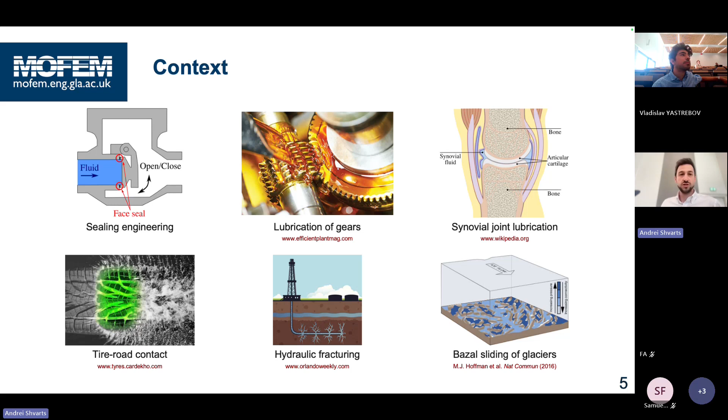But also lubrication, and also thinking about biomedical applications where the fluid can be between articular cartilage parts of the joint, tire-road contact, and some geotechnical applications as well, even as exotic as sliding of glaciers.

The idea was to implement a framework in Z-set, which was being actively developed at that time, where we could project roughness on a very refined finite element mesh, and then bring a deformable solid with this roughness into contact with a rigid surface, and then study fluid flow in the free volume between those two, doing very accurate two-way coupling, such that the contact problem defines the gap for the fluid, but the fluid adds additional pressure.

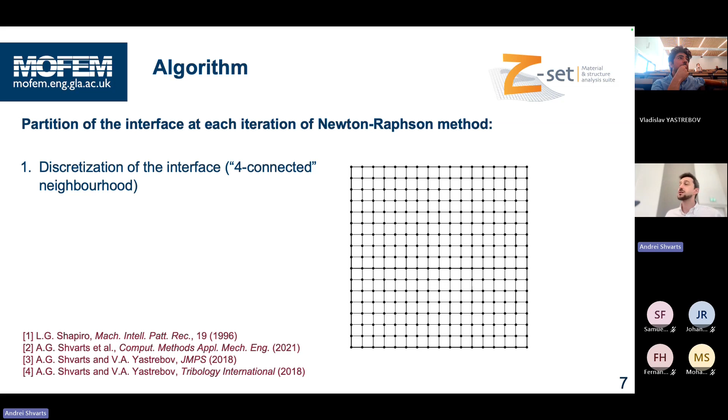Quite a lot of effort was going into developing an algorithm for this, such that at every iteration of Newton-Raphson, we would look into this contact interface, identify contact elements, and then try to look for all the paths the fluid can take from the inlet to outlet. There would be some areas which cannot be occupied by fluid because they are closed off. We call them trapped zones, and we had to identify those.

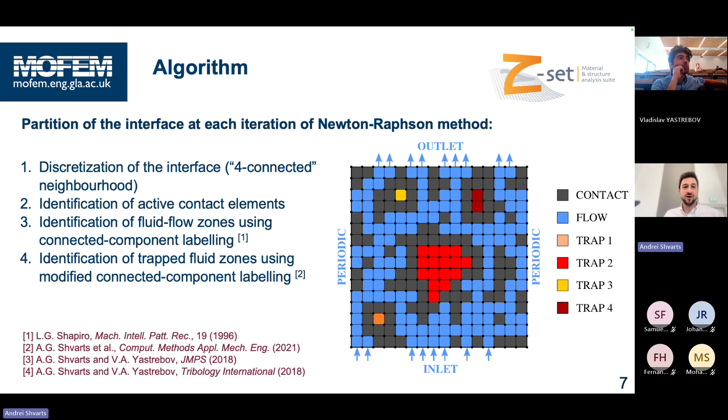Finally, we had to put this all into a kind of monolithic scheme where we have the parts relating to the solid deformation, the contact, the flowing fluid, and also the trapped fluid zones, which were adding additional pressure on the system.

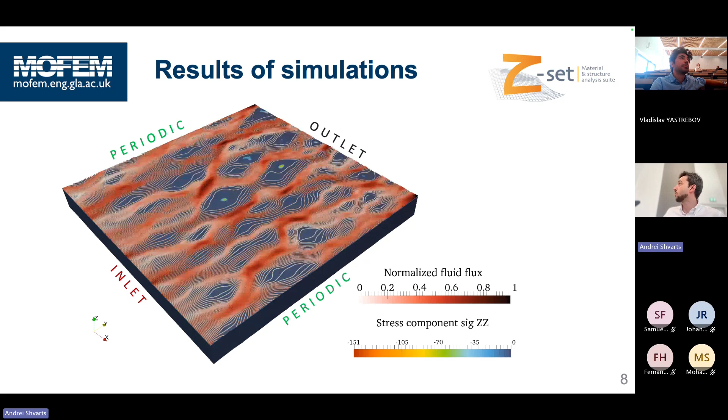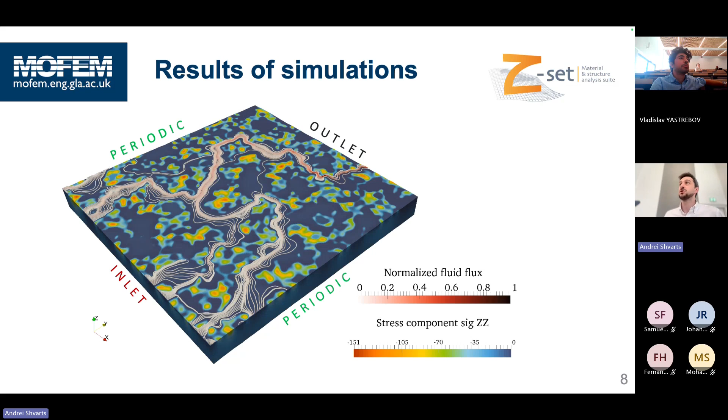And the type of results we could get out of this were looking like this. We could look into the streamlines of the flow with some intensity, and we could also look into the stress concentrations on the tops of asperities which are coming in contact. But we could also see how the pressure is increasing inside of the pools of this trapped fluid. There were numerous pools like this appearing, which were adding to the physics in the interface.

Fast forward to me finishing my PhD in 2019, and then I joined a postdoc at the University of Glasgow, and we were looking into nuclear problems over there.

I don't know if you know that all the nuclear power plants in UK are owned by EDF, and they produce actually quite a lot of energy, not as much as in France, but still a significant amount of energy in UK comes from nuclear.

A decision was made quite a long time ago, in the last century, to make those reactors gas-cooled. This means there is no water inside the reactor. There is CO2, and CO2 takes the heat from the fuel and then heats the water in a different circuit. This was found to be more efficient.

However, this means that the graphite bricks which are housed around the fuel, acting as neutron moderators, take a lot of radiation. And what happens with them is that they crack.

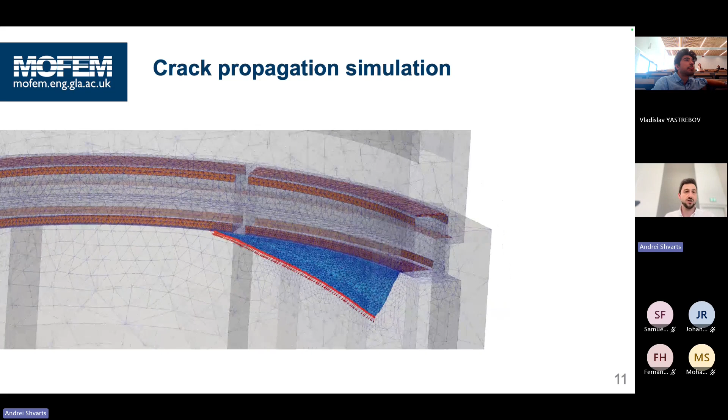So we were looking into the simulation of this kind of scenario, trying to predict how the cracks start, how they propagate, and how the contact contributes to driving the crack propagation.

And what we were quite happy to observe is that we could replicate the shapes of the chips similar to the experiments. Obviously, this was not on irradiated graphite - you can never look into irradiated graphite like this. This was in an experimental setup, but we could replicate the shapes carefully.

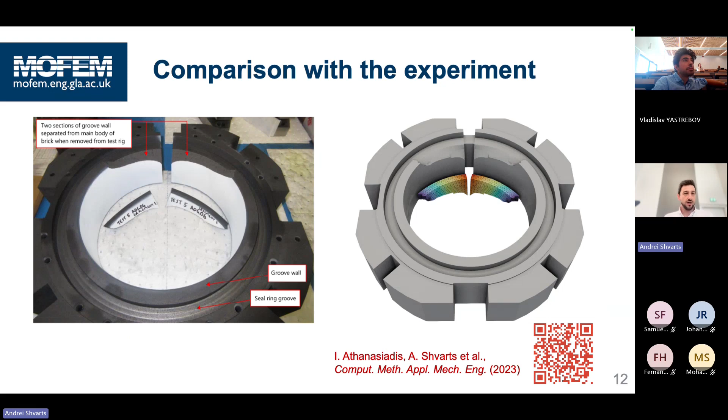Okay, so that's all I wanted to present about my introduction. I want to switch now to talking a bit about MoFEM. All this work I talked about before regarding fracture was done in MoFEM, which stands for Mesh-Oriented Finite Element Method. I hope in a few minutes it will become clear why we are mesh-oriented.

Right now I want to introduce you to the people behind it. We have a group of scientific management, the permanent staff at University of Glasgow, where we supervise the students and postdocs. We have a group of core developers, mostly myself and Lukasz and the postdocs, and then the user module contributors are our PhD students. There are also 15 past contributors, so I would say around 30 people have been developing MoFEM over the last decade.

We have quite a lot of industry support for this, coming from EDF, which I was talking about. This project continues, but then also Rolls-Royce, and recently we started working with German companies, Freudenberg and Siemens, and we have our own spin-out called Mesh-Oriented Solutions that we are starting to develop as well. I'll talk about that in a second if I have time.

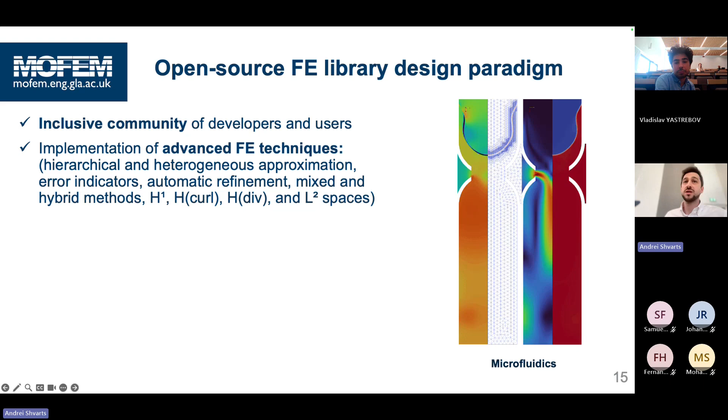These mixed methods are tightly related to the functional space that we're using. Some people call it the de Rham diagram, where we can approximate not only standard continuous H1 functions, but also ones with less regularity that only preserve normal fluxes or tangential components, or completely discontinuous spaces like L2. The whole goal is that by accurate choice of spaces for approximation, you can restructure your algebraic system such that it becomes much more favorable for high-performance computing.

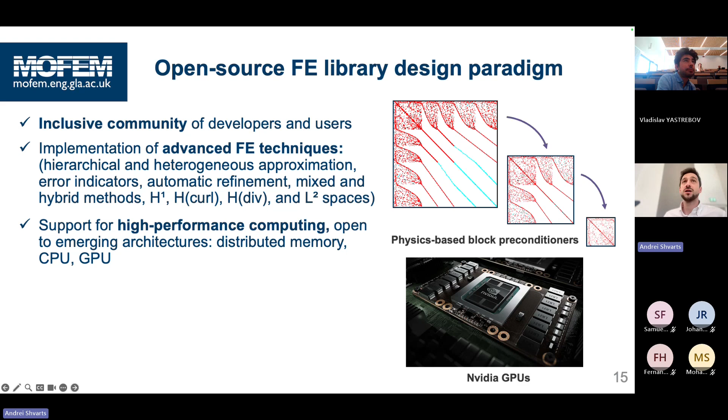I will talk more about this, but the whole idea is to have as many as possible block diagonal matrices, where each element is represented by one disconnected block, because this is the best thing for parallelization. You can quickly spread it on many CPUs or ideally GPUs.

We don't try to reinvent the wheel. We're making our code compatible with many pre and post processors and solvers, material libraries, and so on. And we try to have some elements of professional software development.

I would say this is probably one of the biggest efforts that we're putting energy into, because this is required for sustainability of our development: not just version control, which is standard now, but proper package management, automatic testing, and continuous integration, continuous development, continuous testing pipelines on Bitbucket, so that every change doesn't break the code.

And we have very strict policies on pull requests, that any change coming into the code has to be reviewed by several people, especially nowadays when AI is used. We do put effort into making sure that we understand what the code is doing.

I'm going to very quickly go through the members of the team and the projects I'm working on, just to show you the breadth and depth, but I will not spend too much time on those applications. If you're interested in any of them, I'm really happy to have a chat afterwards.

So two postdocs, Callum and Ananya, are funded by EDF Energy, and they continue to look into fracture, but now they use mixed finite element formulation for fracture. The idea is that you do not need to do anything with the mesh.

You don't need to cut it, you don't need to remesh. The specific choice of approximation spaces lets us propagate the crack using the discontinuity of the displacement field itself. And the whole goal is robustness, accuracy, and efficiency. I will reiterate on this many times, and I will show examples of how this is used.

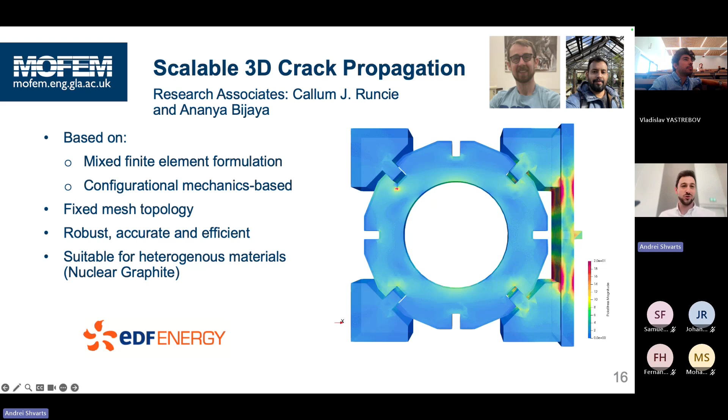Ross is another postdoc. He is working with Rolls-Royce, and he is looking into plasticity, specifically the problem of linear friction welding. It's a very violent problem where you see certain material coming out of the interface. So he's working on developing that.

It has to look at elastoplasticity and large deformations, but also thermal softening and thermal effects. And now he is extending this to look into contact of those pieces coming out of the interface.

Leo is one of my PhD students. It's my collaboration with the Deep Nano group of Professor Viktor Georgiev, and we are extending MoFEM capabilities to semiconductor simulations, trying to look into different devices, different scales, and Leo in particular is looking into drift diffusion and deep density, so density gradient quantum corrections, but also I'm helping him with what I learned during my PhD into adding roughness into the interfaces between different parts.

Here is roughness between an oxide and silicon. He's looking into the effects of this roughness on the performance of the device.

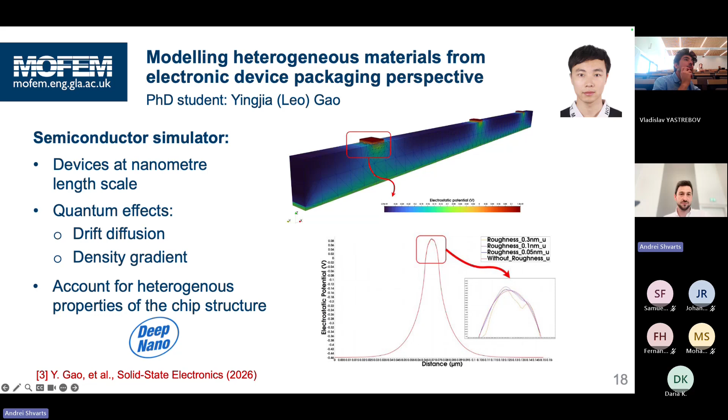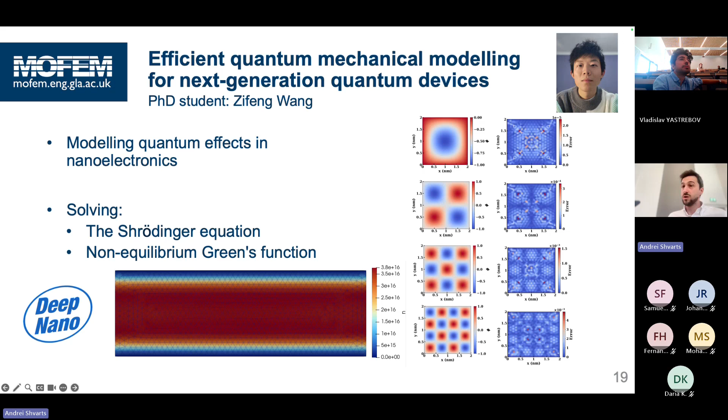Another PhD student coming from Viktor's group is Zifeng, and he is looking into simulating more or less the same devices, but from a purely quantum mechanics perspective with the Schrödinger equation. But since our code is quite universal and not specifically tied to mechanics problems, but can solve any PDE, it's not a problem for us, with the help of PhD students like Zifeng, to extend this to the Schrödinger equation or non-equilibrium Green's function. But this is just the start of this work.

Two PhD students joined us last year, funded by Freudenberg. Mohammed is the first of them, and he is looking into optimizing tubular structures for braiding for catheters, for medical applications. He's using an adjoint method for this. That's the plan of the work, to use adjoint optimization to make sure those tubes work well both in tension and torsion, and can sustain certain kinks happening in those applications, and so on.

The second Freudenberg PhD student is Cleison, and he's looking at an interesting problem of mechanical seals. Those are devices where you have to introduce sealing between rotating parts, but you cannot put any material there because it's just going to be destroyed by friction. So the idea is to keep the interface sealed by the buildup of pressure in a tiny gap.

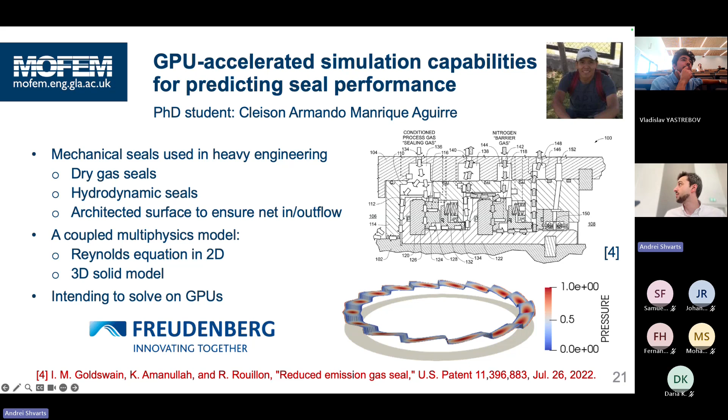So that's what he's working on for the moment on the Reynolds equation. The idea is to couple 3D solids with 2D Reynolds equation, also using the mixed methods.

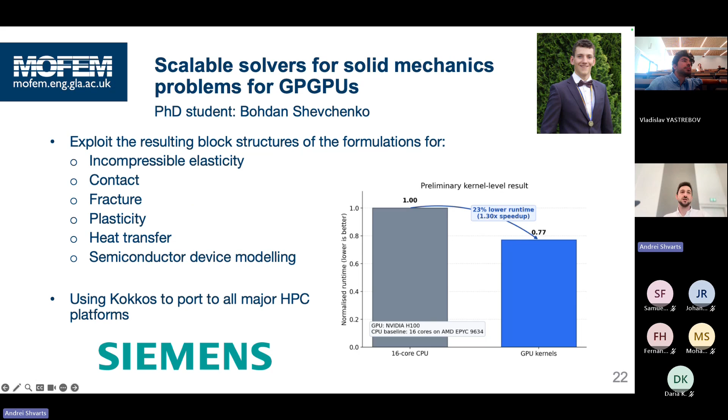We have a dedicated student, Bohdan, funded by Siemens, specifically focusing on porting our code to GPUs. Other students are responsible for creating the matrix structures efficient for GPU parallelization, and Bohdan works on actually coding what happens on the GPU side. Right now he has chosen a library called Kokkos for this, after several different tries of other available tools.

Kai is another PhD student I supervise. He is not developing MoFEM directly - he's actually working in the School of Cancer Studies, looking into mechanical changes in flies when they are infected. He models the infection using some kind of bacteria. The idea is to see how the body of a fly restructures and reacts to the infection, and use this as a model of the response to cancer. A very standard method in this domain is to use atomic force microscopes to probe the stiffness of tissues, and what I'm helping him with is accurate identification of material properties using finite element simulations.

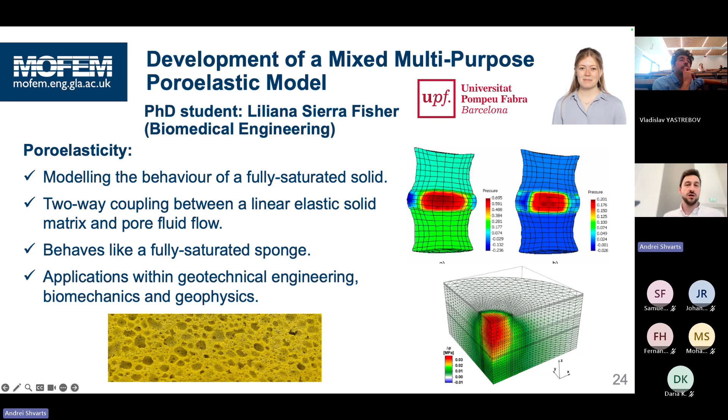Lily is another student we have who is looking into problems of poroelasticity together with colleagues at University Pompeu Fabra in Barcelona. She's developing a mixed poroelastic solver which can be applicable both for biomedical and geophysics applications.

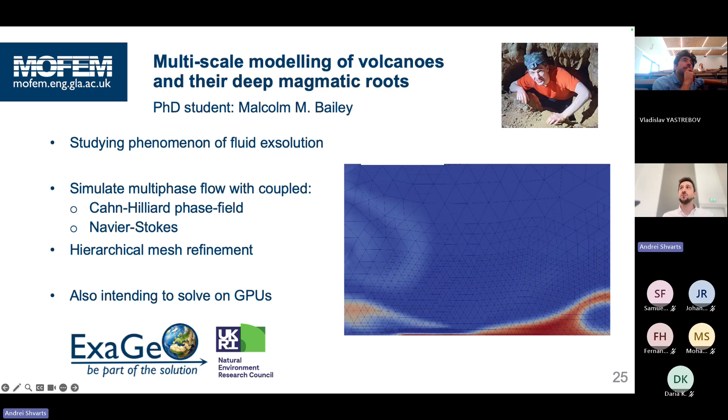Malcolm, I don't directly supervise him, but he's working in our group, and he is looking into magma simulations, also using MoFEM. Finally, in this deck of slides, I wanted to mention our spin-out, initially created by Karol and myself - Lucas and Chris have joined him.

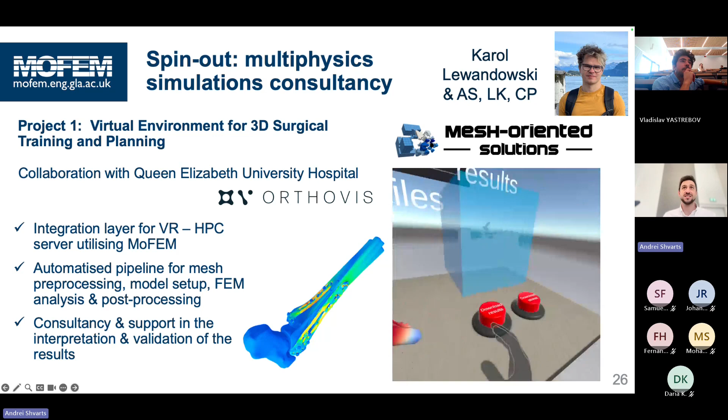It's called Mesh-oriented Solutions, and our first project has been, and still is, a collaboration with a hospital in Glasgow - I think the biggest hospital in Europe, which also does research. The idea is to use VR to help surgeons plan surgery on a patient with broken bones, where they can try to assemble those bones together in VR before doing the actual operation.

Okay, now I want to switch to two more research problems where I could showcase how the ideas I discussed before can be applied in practice, just to make it a bit more tangible.

The first one is about the data-driven finite element framework. This was the work of my first PhD student, Adriana, who finished very successfully last year. Now the second student working on this is Heri. They're both funded by EDF Energy.

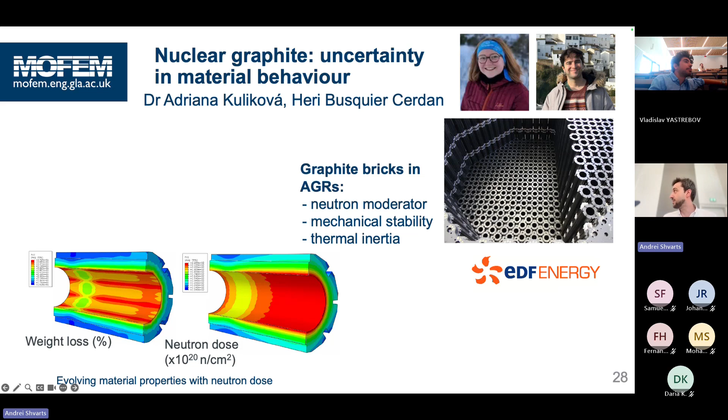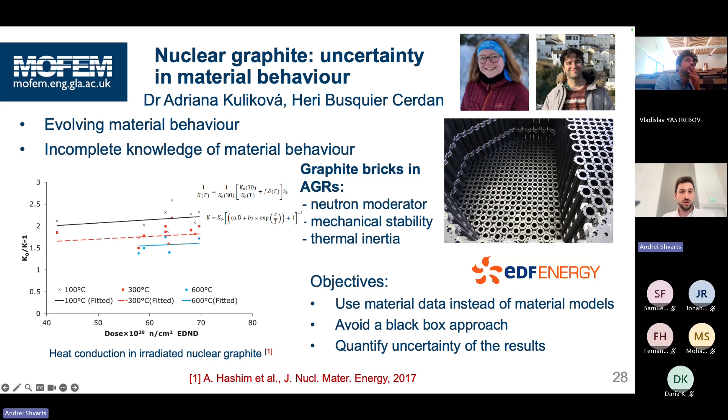So our idea was to try to create a method which would use material data instead of material models, but would avoid a black box approach that maybe some of the modern machine learning neural network approaches do. We want to be able to minimize the errors, but also quantify the uncertainty of the results.

Maybe what I want to ask is how many of you are familiar with the data-driven finite element approach of Michael Ortiz? Okay, good. So I will do a very quick introduction of that, but hopefully it will make sense for you.

The idea is that we were looking into the thermal flow problems. If you look just at the conservation laws for the thermal problem, that's something you know should be satisfied exactly - this is a law of nature. The boundary conditions are also something you want to observe exactly. So we're looking into the temperature gradients and fluxes.

Well, obviously we cannot solve this problem - something is missing, the constitutive law is missing. But constitutive behavior is something we want to avoid, because it's always approximated. When you start to look into complex materials like irradiated graphite, those material models can be a little unreliable. But the whole idea here is: let's say you have a huge set of data points showing the dependence of heat flux on the temperature gradient.

Okay, maybe it would be more accurate if we said that this was one of the components of the heat flux versus one of the components of the temperature gradient.

Okay, let's say that you have this kind of data. One could say that probably it's noise, there's lots of noise. Let's fit this to Fourier's law, let's find this coefficient k, and that's it. And let's use that, and let's forget the data.

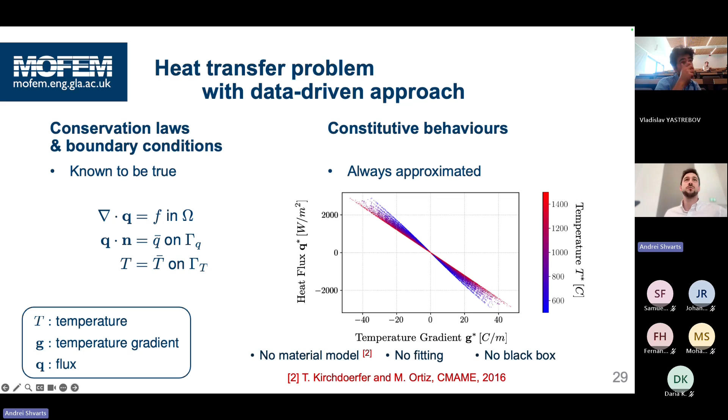Okay, so we sometimes say that finite element method is an art of controlling errors. So this is what we wanted to bring to this data-driven world, if you want, and that we can use the finite element formulations, weaker mixed formulations, for example, to control the errors, to refine only where we need to refine, and so on. And that would allow us to remove the finite element approximation errors from the uncertainty associated with the material behavior, with the data.

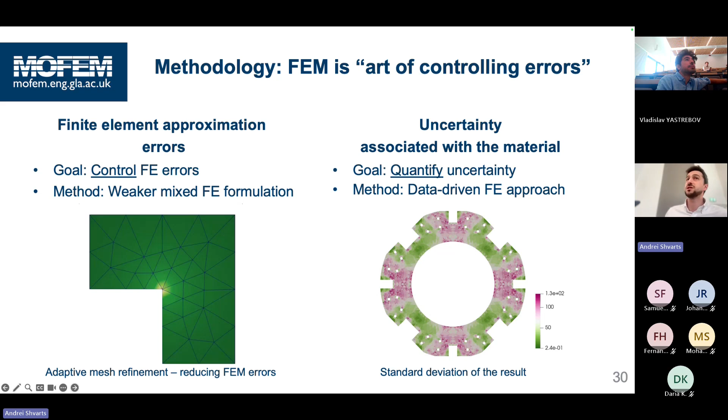And then once we have done that, we can properly quantify the uncertainty of the data. And this is where the data-driven approach shines the most.

Okay, so in a nutshell, what is the data-driven approach? You think about two domains. The spatial domain, where you have your finite elements, you have integration points, and in those integration points, you have the fields like temperature, flux, and so on.

Okay, and then, but this point from over here might not be satisfying our conservation laws. So what we will do, we will try to map these values from the data set back to our integration point, and we will try to minimize the functional, bringing the values at this integration point as close as possible to this data set values.

But at the same time, we will add conservation laws and boundary conditions as constraints, which are to be satisfied exactly, or in the integral sense. So that we will keep satisfying those constraints, and we will try to be as close as possible to the data set. And we will try to do this iteratively, and we will get closer and closer to the data set. And at the end of the day, we're going to have an intersection of a kind of a hyperplane, which satisfies conservation laws and boundary conditions, with the data set.

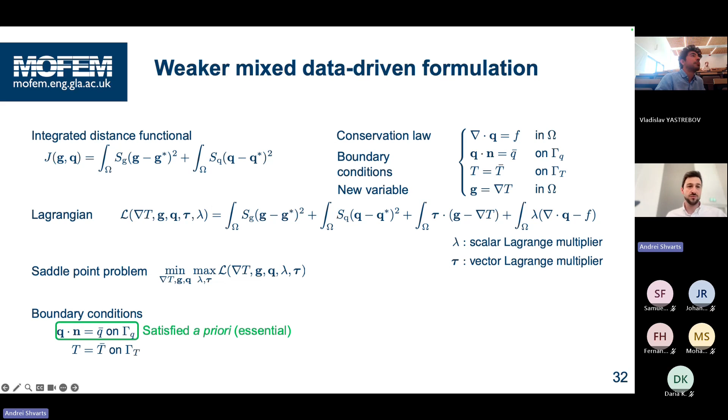So this is where our new formulation comes in. We introduce a new variable, which would represent for us the gradient of temperature. And then we will solve the saddle point problem, and we will treat properly boundary conditions. Okay, I don't want to spend too much time on these technicalities.

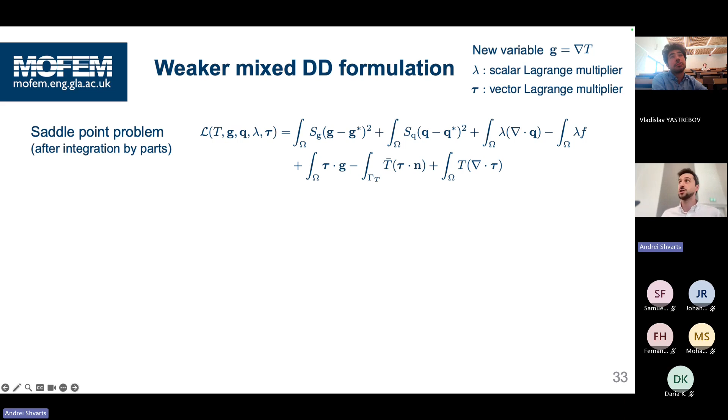It means we can choose finite element spaces differently from the original formulation. Specifically, we can choose discontinuous approximation for temperature, gradient of temperature, and lambda, because they do not have any differential operators acting on them. This is actually quite favorable for data-driven methods, because you can have different material properties chosen at different integration points of your elements. So there could be jumps in response even inside of the element, let alone between the elements.

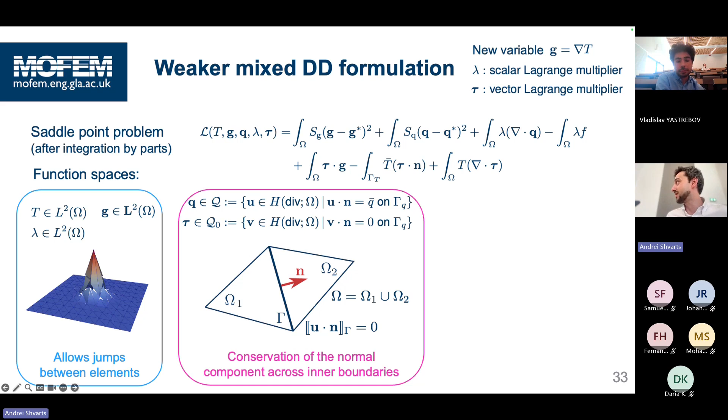But then for the flux, we need to choose a space which allows us to compute divergence. That's the space called HDIV. The intrinsic property of this space is that it conserves normal flux across any inner boundaries. So for free, we get a space designed to satisfy conservation laws in the strong sense. But what's also more important, this is the bridge towards efficiency, is that we get a matrix structure which has a lot of those block elements.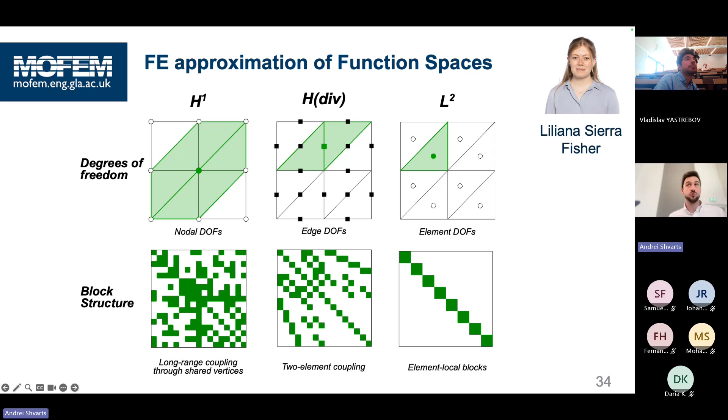Okay, you cannot have the whole matrix looking like this. You need to have some mustaches coupling them together, but that could be easily dealt with Schur complement. I will show a small example of that later on.

But this efficiency is only one of the aspects. A different aspect is that we have high accuracy, high convergence. If we compare the original stronger formulation with more classic fields to our formulation, the weaker one with the fields I've just discussed, we see a very different story. In the standard formulation, your temperature will be continuous, your flux will be discontinuous. In our formulation, it's the opposite: the temperature is discontinuous, the flux is continuous, or at least the normal component of the flux is continuous.

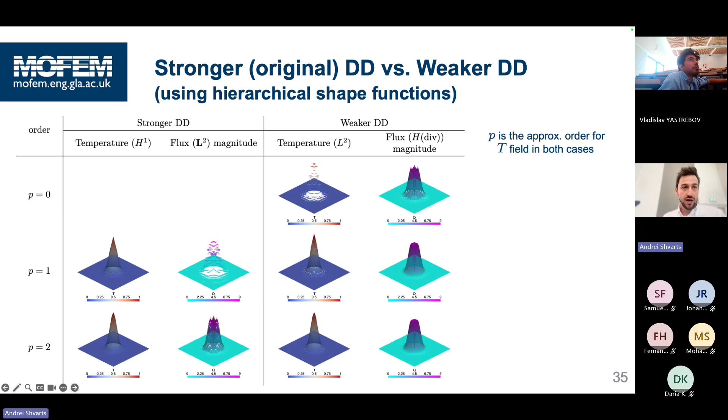What this means is that we can look into the a priori error estimates. For example, they're available for our formulation for both temperature and flux. If we look at the error estimates for the standard formulation, the estimate for the temperature field is the same in both. But for the flux, we have convergence with rate p plus 2, while for the original one it's just p. So we have super convergence with our method because of the proper mixed formulation. What's also nice to observe is that the approximation of flux for the second order is the same in the standard one as the approximation of flux in the 0th order, which means it can be pretty efficient.

Another benefit which comes from the mixed formulation is the error indicators. I talked about a priori estimates, you get that from the very beginning, you know what's going to happen, it always works if your implementation is correct. But what's sometimes more useful is a posteriori error estimates, which can drive adaptivity. I'm not going to go into the details too much, I just want to show you an example of how we do this.

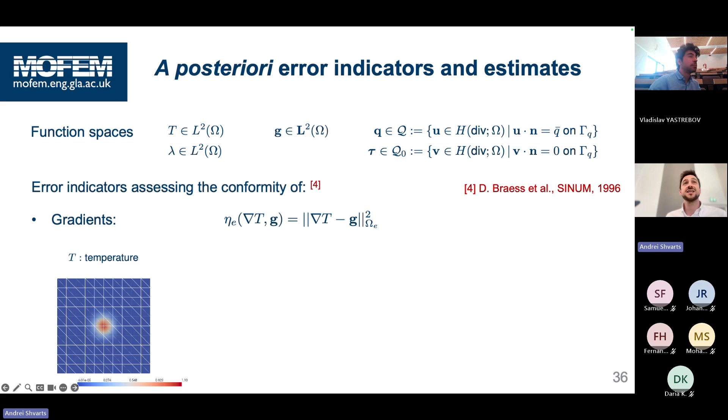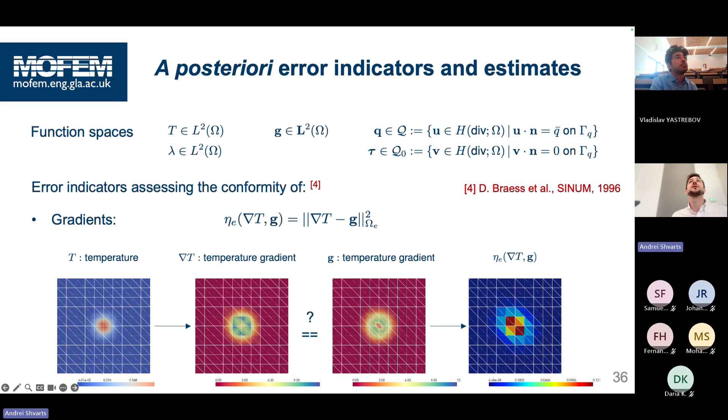So we get this temperature field, and it's discontinuous between elements. But once you've obtained the solution, you can compute gradients numerically on this field at every point inside each element, compute them at Gauss points, and visualize them. We also have this field G, which stands for the gradient of temperature, approximated separately. They are somehow close, but not exactly. This is where the error estimator comes in, because any difference between this field and this field is our finite element error. So we can look at the difference between them and highlight the elements where this error is highest and refine them, either by refining the mesh or increasing the approximation order.

There are more accurate error estimators that we have looked at, but I don't want to spend time on this. I want to jump to an example.

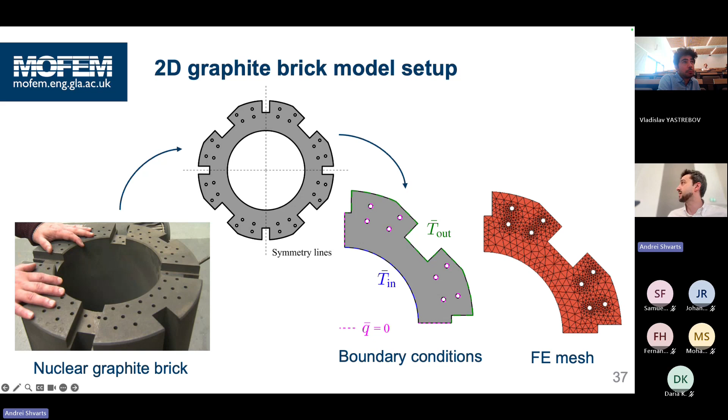So we looked into this graphite model, and we were looking at the problem with high temperature on the inside and lower temperature on the outside. This represents what's happening with those bricks in reality. We didn't have the actual data, so we generated synthetic data ourselves. We looked into a standard finite element analysis with a complex nonlinear material model relevant for graphite. We generated and obtained the solutions, took the Gauss point values from the fields to generate a data set, and this is how it looks.

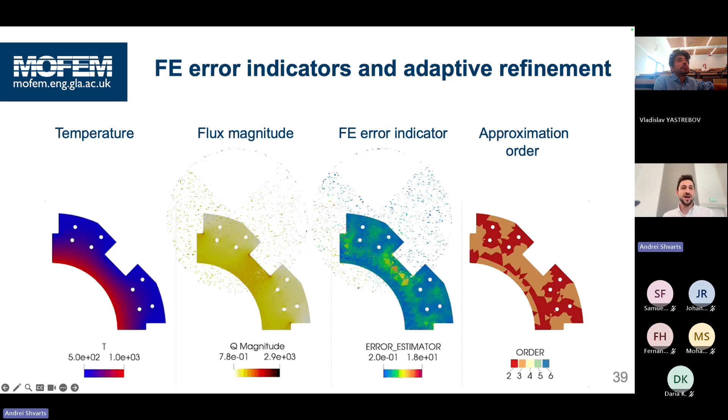So Joanna spent quite a lot of time understanding why, and the answer came from the fact that she looked into the values of the fields in those regions where we have those high errors. She mapped them to our phase space of the material dataset, and she realized that those points are actually quite far from the dataset, so we don't have enough data. We need to do more experiments with this particular material to be able to map better the values at those elements.

But what it also meant for us is that those finite element error indicators are not good enough for quantifying the problems with the dataset. So Joanna introduced a so-called data-driven error indicator.

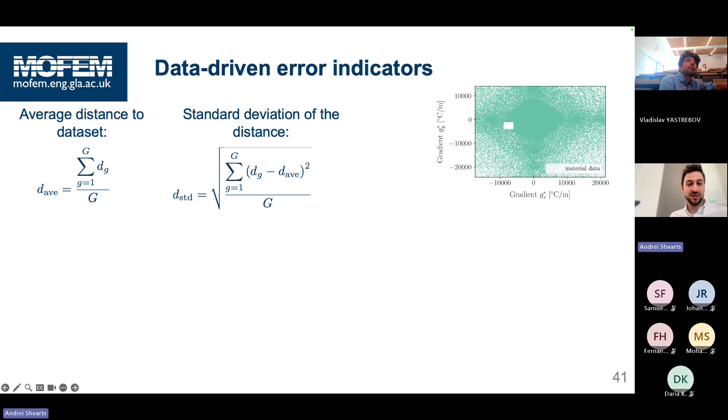An example here: we took a dataset and we specifically took out a small portion of it. Let's say our equipment was faulty in that region - there was something wrong with our thermal camera, and that's why that place is blank. There's missing data there. So we did a similar kind of analysis with adaptive refinement, but also looked into this error indicator, which is based on the distance to the dataset.

We compute the average distance from the field values at integration points to the dataset, and the standard deviation of that. And what we have observed is that there are regions where we have this higher average distance to the dataset and high standard deviation of that.

And what's most important here is that if we map those points, those values, back to our dataset, they're exactly in that empty window. So we can identify, without actually knowing a priori, where the problems are in the dataset. So we can tell experimental collaborators, let's do more experiments if you want to have reliable results.

But missing data is not the only problem. You quite often have noise. So we wanted to have a tool which would measure the noise. And for this, we proposed a method of uncertainty quantification based on the Markov chain Monte Carlo.

The idea there was, to test this, we just got this dataset and added some artificial noise. And the idea was to do our refinement. Since we have done the refinement, we are very efficient in getting accurate results, so we can try to perturb the resulting fields and solve again, and then perturb again and solve again. This is in a nutshell what a Markov chain Monte Carlo looks like in this particular case.

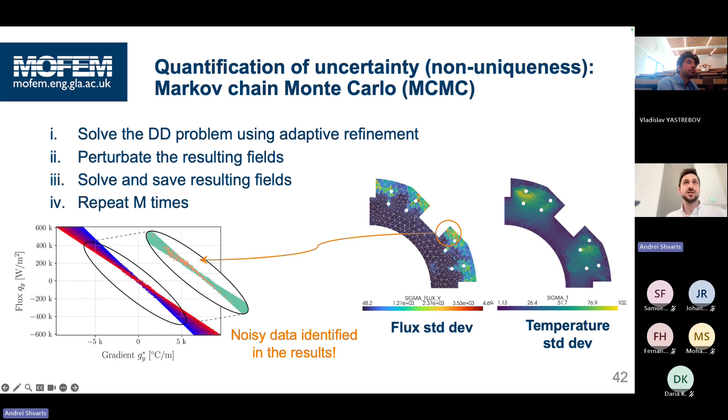Okay, I don't want to spend too much time on this. I wanted to cover contact as well, so I will skip those slides. And if anyone is interested in data-driven methods and its extensions, I'm happy to talk about this.

In the last 10 minutes, I will just look into our work on contact. And maybe I will try to explain the main kind of beacons of development for us, which are to ensure robustness, accuracy, and scalability of our tools.

And this is not just about the contact - this is for all of the applications we are working on. But I will try to explain an example of contact, what those mean. And we will look into many different contact problems.

For example, those ones related to graphite bricks - they have contact originating, we have fracture originating from a contact corner. And I think it's like this - please remember that, we will see this example later on.

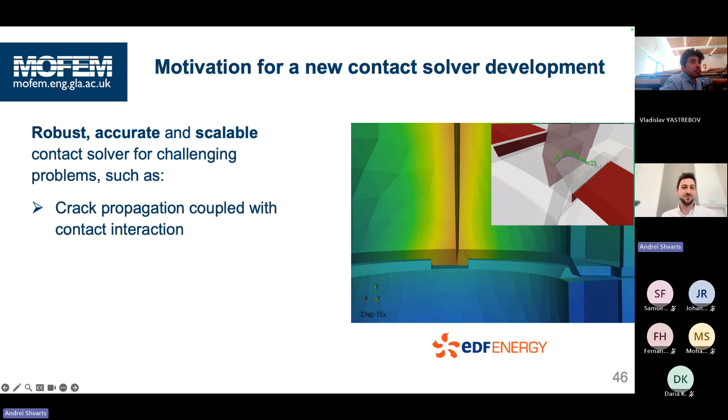I will use that. But we have other problems with plasticity as well, used for forming, linear friction welding that we already talked about, and then turbine generators, one of the examples that one of my students is working on - I'll show some results at the end. And then also what we've been doing from our spin-out with Freudenberg, looking into the bushing and sealing applications.

Okay, so the contact problem. How many of you know the contact problems? How many of you know the contact problem formulations?

Good, so I'm not going to spend too much time on this, but the idea is that you introduce the gap function, you introduce the KKT conditions, which govern the fact that the gap shouldn't be negative, you shouldn't have penetration, your pressure shouldn't be positive, meaning that the normal traction shouldn't be positive, meaning that you don't have adhesion. And then when one is 0, another one is not.

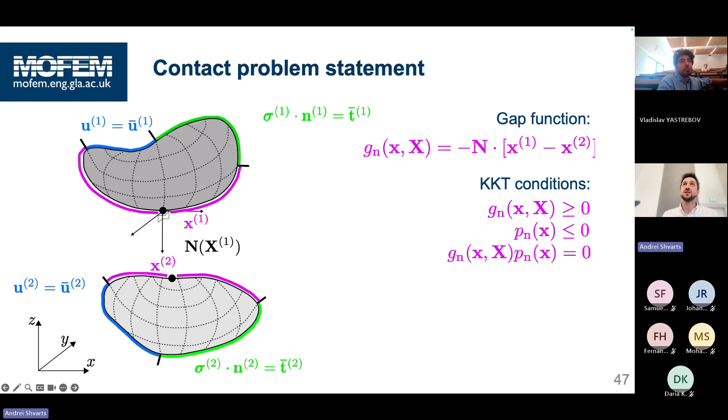So usually you solve these problems using Lagrange multipliers. And one of the methods which is very efficient for this is to use the complementarity function. And then when you formulate the weak form, you have the standard internal and external terms. The internal is coming from the stress inside, external is coming from the tractions outside. And we add the terms for contact.

So we add an additional term representing virtual traction, virtual work of contact traction, where instead of the value of the traction, we have Lagrange multiplier. And then we have the additional equation, which we use to enforce the KKT condition. This is just our complementarity function weighted by the test function of Lagrange multipliers.

And in this setting, it's very clear which space we can use for displacements. We can start with the standard H1. But the question is which space we could use for Lagrange multipliers.

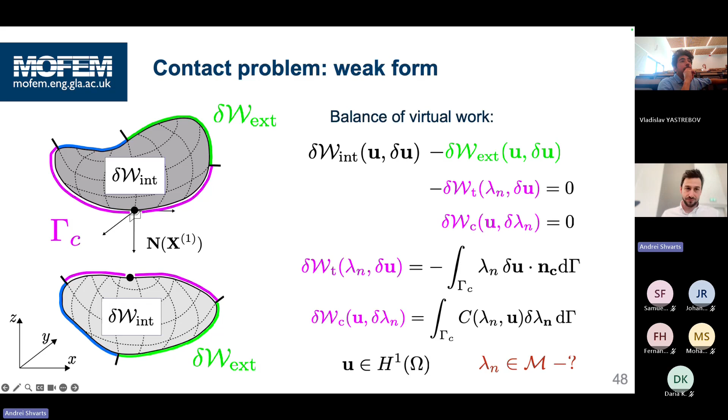Maybe to show very quickly why this is so important, if you start from the simplest problem that several of you have been looking at, a wavy surface of a solid body, which is coming in contact with the rigid flat.

If you take continuous shape functions for the approximation of Lagrange multipliers, you will see something like this. You will see a result which agrees with the analytical one almost everywhere. There are some discrepancies here at the center because I used first order approximation. I know that I can bring it closer if I use either a finer mesh or higher order approximation.

But look into the problems over here. Look into these horrible oscillations. They're not really leading to any catastrophic instabilities, but they are not nice. You don't get the correct approximation at the boundary between contact and non-contact zones.

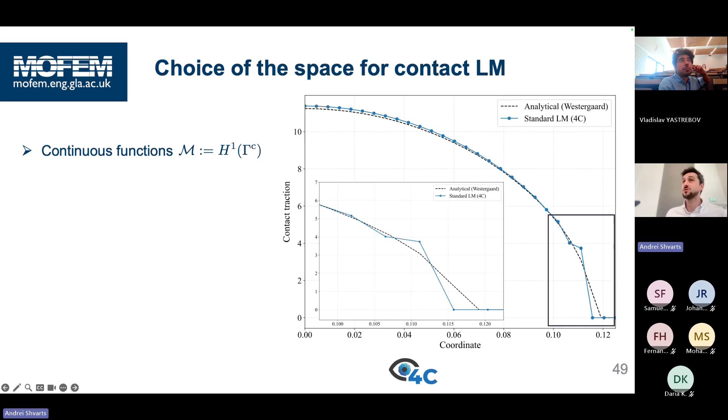And the reason for this is the variational crime we made by considering continuous functions for Lagrange multipliers, which are not continuous in reality. People have found a solution for this, particularly the work of Barbara Wohlmuth and her colleagues, to introduce the dual space. So the idea is to go into a discontinuous space, or dual space, for Lagrange multipliers. The idea is that if our approximation of displacement is in H1, on the boundary it has a trace in space H1/2.

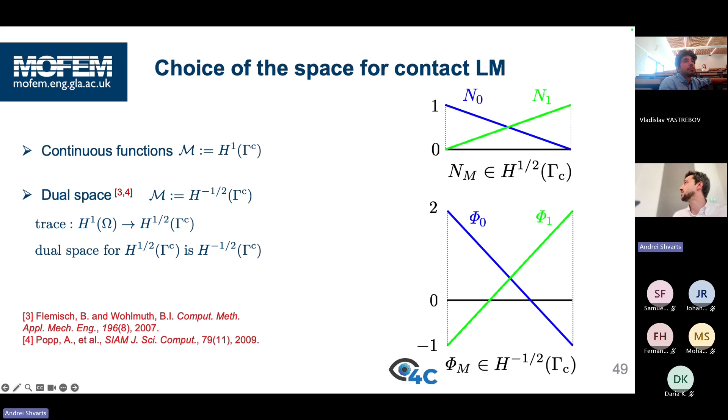It's called fractional Sobolev space, and the dual space to that is called H-1/2. And there are some special dual shape functions which can be constructed, which are from this space. And that works very well. You get the solution which looks the same everywhere, except for this boundary of contact, non-contact, where it doesn't have oscillations.

But we wanted to extend this because this basis is not hierarchical. It's very hard to construct high orders. And also, it might have some other issues in some specific cases.

And remember, I was telling you about the contact in a corner of 90 degrees. So I tried to replicate this problem. Imagine a bimaterial plate where you have a contact on a horizontal interface and on a vertical interface. And we squeeze it from both axes with some value of pressure vertically and another value of pressure horizontally.

And what you expect is that in this particular symmetric case, you know what should be the values of the contact pressure on this interface and what should be there. So if you try to approximate this problem using continuous standard shape functions, we used the 4C code for this.

You will see oscillation. So in this first part of the interface, I'm showing the horizontal part, from -2 to 0, and then from 0 to 2, I'm showing the vertical part. So you know what it should be. It should be 0.1 until the coordinate 0, and then it should be 0.01 later on. But it's not that, because our shape functions can't approximate this discontinuity.

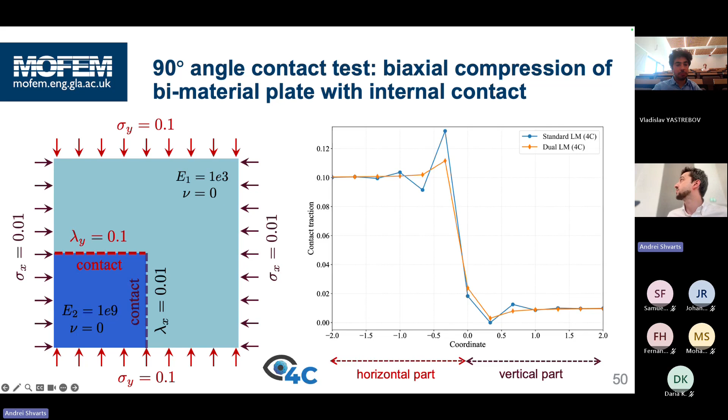They are based at the nodes, as you can see in this construction. Yeah, they are still based at the nodes, so they cannot approximate this jump exactly. So we want to have something more general. I probably don't have too much time to go into details.

I'll just try to explain the main idea: we have Lagrange multipliers that are not scalar, not vectorial, but tensorial. Because we can create this space which looks like stress, but not exactly stress. It's not symmetric. We can construct this tensorial space of Lagrange multipliers, which are in HDIV approximation. And if we take their normal trace on the contact boundary, it will be exactly in this H-1/2 space. So it will be very similar to these dual shape functions, but constructed differently.

And all we need is to go into our weak form and substitute this traction coming from contact by this normal trace of this tensorial field of Lagrange multipliers. The trick is to approximate those Lagrange multipliers in the elements adjacent to the contact zone only. So all we need is to compute this traction through this boundary, and for that it's sufficient to have degrees of freedom only on the contact edges.

And we can still compute the shape functions of those degrees of freedom in those adjacent elements. But the degrees of freedom will live only at the edges, not at the nodes, not at those internal edges, only on the edges exposed to contact. And by using this formulation, we can still formulate our terms for contact, for virtual work of contact. They look a little bit longer, but they have exactly the same meaning.

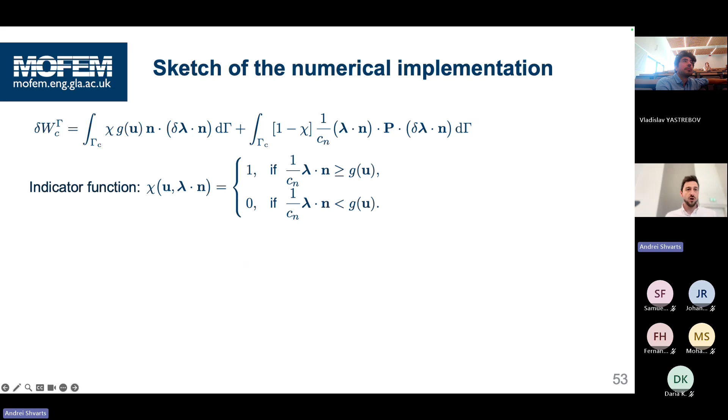I don't want to spend too much time on the numerical implementation just now, so I will skip that. I just want to show you the results, which look very nice, where since we don't have those Lagrange multipliers at the nodes, we have them only at the edges.

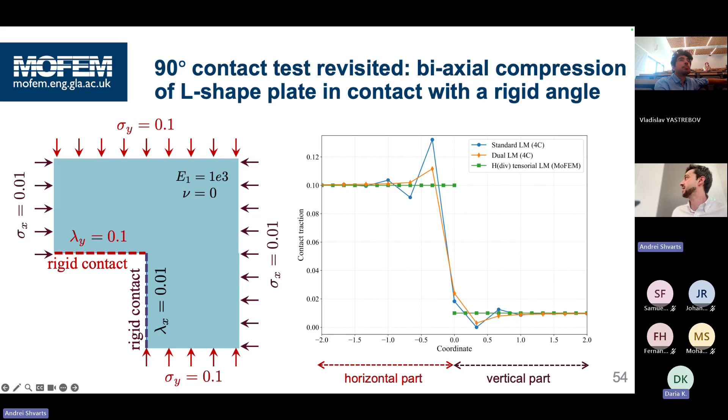It means we can represent the jump of our contact traction between this part of the interface, where it should have this value, and this part of the interface, where it should have 10 times smaller value. We can represent this with our formulation exactly.

That was robustness. Now for accuracy, it's about convergence. So we could look into some classic problems where we have an analytical solution for the contact pressure. We can look at the a priori estimates for the expected error of the normal traction, and using our hierarchical approximation, we could test the convergence by decreasing the element size for different orders.

And we recover the expected estimate for the first order, but then as we increase approximation order, we get a higher and higher slope, which consistently increases by 1. This was for the case of full contact.

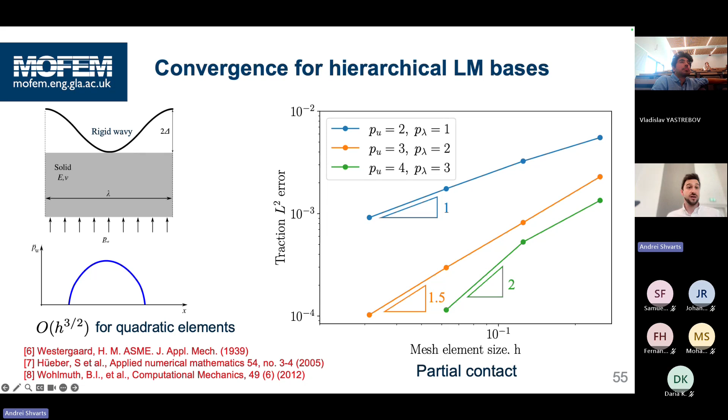It's quite more complex for the case of partial contact. There are different estimates for this case as well, and we could recover them and keep improving if we increase approximation order. So we are sure that we have accuracy with this formulation.

And the final part is the scalability or efficiency. This comes from the fact that we could construct a very efficient solver. You know that when you have a saddle point problem like this, you cannot apply iterative solvers, and you cannot apply a direct solver for this if the problem is too big.

You can use MUMPS for the problem with tens of millions of degrees of freedom, but the memory required would just go through the roof. You cannot apply an iterative solver to this matrix because it's not positive definite. It's not going to work very well.

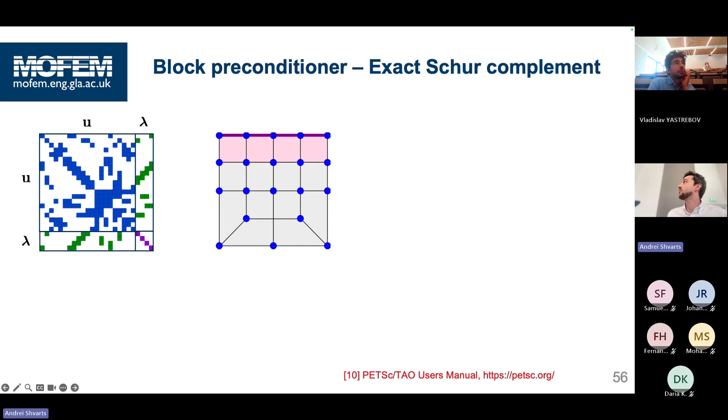You need to do something, and what we do is we use the Schur complement. And what helps us is that those degrees of freedom, like I said many times already, they live on the edges. The property is that those elements don't talk to each other.

There is no continuity of traction between the two elements. So that means that when we take the degrees of freedom from Lagrange multipliers, they form this beautiful block diagonal part of the matrix, this lambda block. And that's why we can assemble the Schur complement, which is by itself a very useful technique.

But what we can do is efficiently assemble the Schur complement using inversion of this matrix D element by element. Because those blocks are disconnected, you can invert each one separately and then construct the Schur complement element by element, which is much more efficient when you have a highly parallelized system.

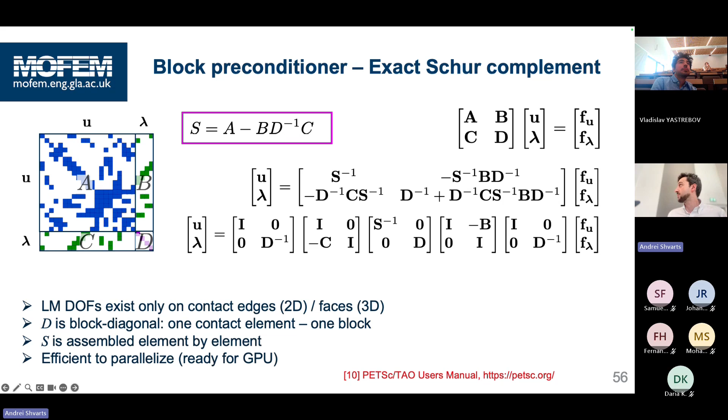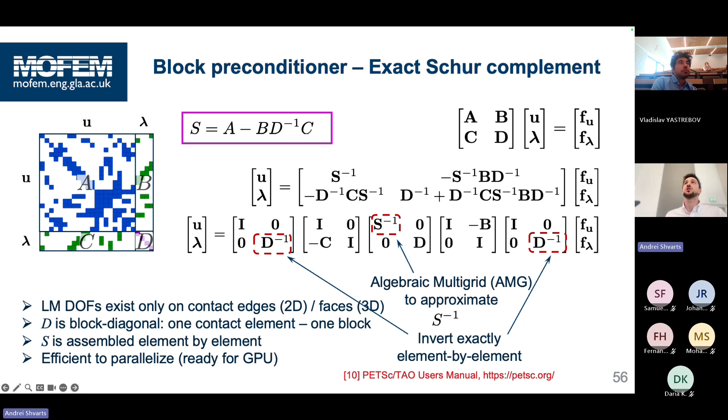Okay, then we do the usual steps from the Schur complement, and at the end of the day, the only thing which is inverted to obtain the solution for displacement and Lagrange multipliers is this matrix D, which is inverted exactly, and then the Schur complement itself has a nice structure. Now we have a nice structure for an iterative solver, and we can use the best ones available, like algebraic multigrid.

This is applied to the problem of TENGs, work of my student Tanzib. If you're interested in this application, we have an arXiv preprint, which hopefully will soon be published. The idea is that we need to look into very accurate roughness.

Those are devices which produce electricity from charges appearing in the contact spots between the two layers. The goal is to look very accurately into this representation of roughness to get very accurate maps of the contact area and their evolution.

So if you want to do 10 load steps for this particular mesh, it will take just 10 minutes, and in 10 minutes you will get results like this. Maybe a bit longer here because this mesh was larger, but this could be very efficient in getting the results.

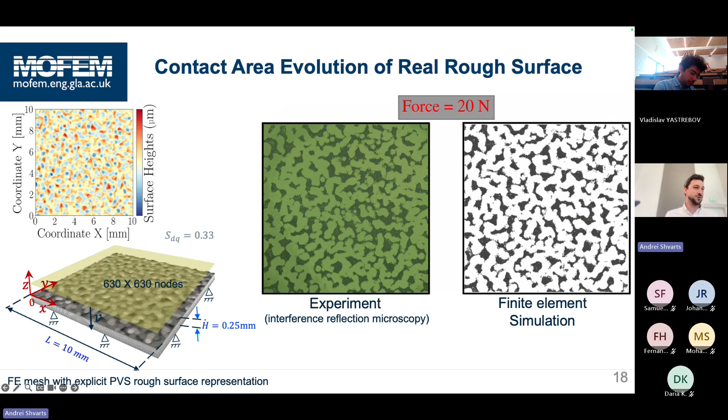But it's not only efficient with everything I said before, it's also robust and accurate. When we compare our results to experiment, we get much closer than any analytical approximations, with which we still agree in their asymptotic limits.

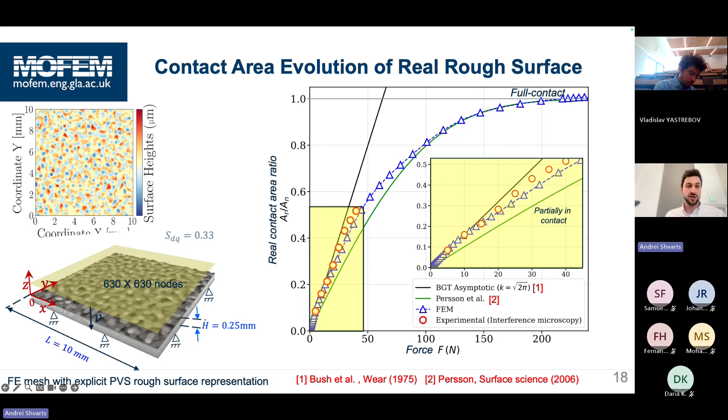I think I want to finish with this, and I hope I was able to convey with this example how we try to tackle, with our formulations and implementations, robustness, so that no pre-processing is required for the meshes and for any particular contact regions and so forth.

Accuracy, that we can have our higher order approximations, which could be adaptive, refined on the fly. And finally, scalability, that we choose the spaces and the structure of our matrix in a way that is most efficient for modern HPC architectures, specifically GPUs, which are not about solving large complex problems, but about solving small dense problems.

So we can manage better how we distribute our problem between many small cores with little memory.

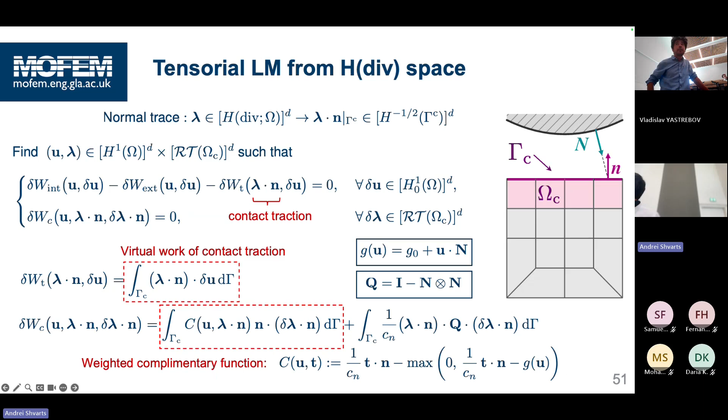I have a doubt about when you fill the data. You show that you have a lot of data, and you say you can fill the data. First, I was wondering how the data is filled and the accuracy of this data. I was wondering also if it's very important, since it's missing that. I was wondering if, for example, it was possible to artificially say that I have some missing data here that in fact you already know, and you try to retrieve this new data and verify if this predicted one corresponds to the original data. That is my question.

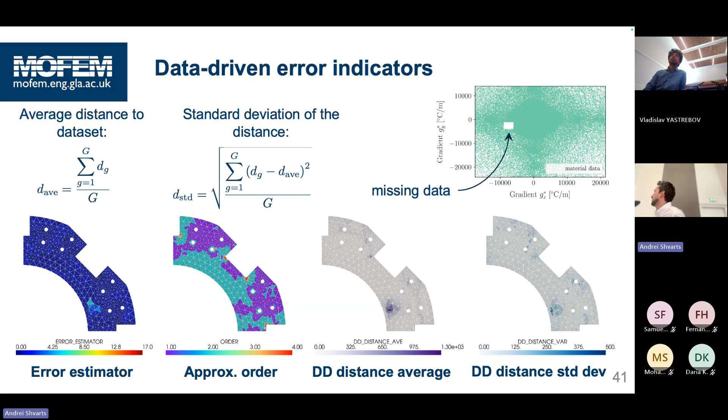So if I got it right, what you're suggesting is try to do another synthetic experiment, fill that missing block and see if this disappears. Well, I don't have results to show of doing that per se, but I think Johan did this kind of thing, and you would have what you expect, the same plots as these without that highlighted region. But okay, it's a good example actually. Thank you, maybe we'll make one more step of showing how this fixes things.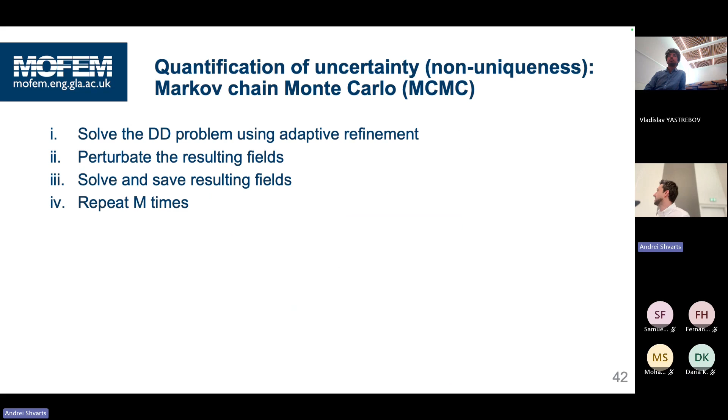But I just want to say that what we're doing here was the first step. We didn't really work with the data how it would work in reality, because synthetic data is one thing and real data is different. I didn't have time to talk about this, but there are extensions of this method, called data-driven identification, which helps you get the data from, for example, knowing only stress, to get the stress from only knowing strain, from maybe digital image correlation, and knowing the external interactions and boundaries, you can infer both stress and strain and use that for the data set. We want to use that to be able to say, can we actually work with the data sets? Can we identify the issues? And can we fix them?

The question about this, the same slide, is this temperature? So here there is no particular material reference frame, right? So we have GX and GY data all along, but if the material has its particular anisotropy, how do you deal with this data-driven stuff? Because here you have so long, but you don't have some reference orientation of the material. Because maybe this irradiation somehow, the regional construction of graphite has some intrinsic anisotropy.

Yeah, of course, most likely it does. But actually, what we did here, we didn't consider the case that it's isotropic, we didn't require it to be isotropic. So it's just that for lack of space, I showed only that one. I could also show you the view of the GX component versus, as you can see here, it's G, that's the gradient GY, gradient GX, but I could show you all the other ones. So from the way they were generated, especially when we consider the noise, they wouldn't be the same in all directions. So we didn't assume that we're looking into a homogeneous and isotropic material.

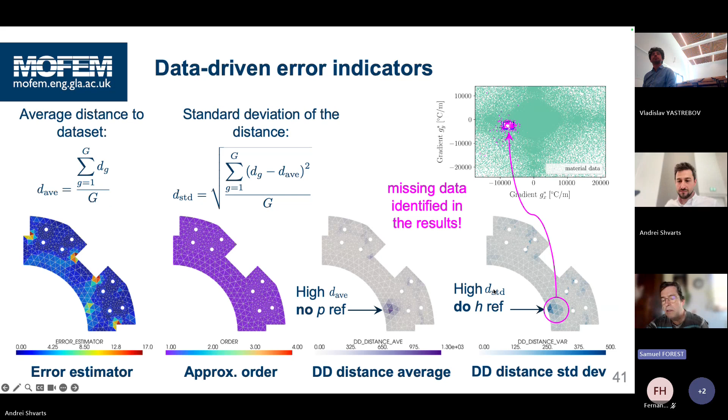I have a question on this subject. Thank you for this fantastic talk, you are doing so many things and many aspects are useful for us. Regarding this data-driven application to thermal conduction, I am a bit puzzled because in reality, the Fourier law is never questioned. In thermal problems, usually you take Fourier, you don't have nonlinear Fourier. It's mostly a problem of measurements, and the real problem comes from the boundary condition, from the exchange coefficient H for the convection. And this is where probably data-driven would be useful, because we don't know so well how to model the interaction at the boundary. And here, you did not really discuss that, this boundary condition of convection.

Right, yeah, thank you, Samuel. Right, I didn't discuss that, we didn't look into the convection here. This can be done, we were thinking about this. I think there may be some works already in that direction. So this could be an extension of the data-driven method.

Any material property, like H in Newton's cooling law, can be removed from the problem formulation, and instead we can do this search in the dataset. You would couple flux with the temperature difference on the boundary, between the temperature on the boundary and the ambient one. Yeah, this could be done.

But on the first part you mentioned, I want to expand a little. Fourier's law by itself is well established and can be used in many applications. But for complex materials like irradiated graphite, the coefficient of conduction depends on both temperature and temperature squared, which gets tricky. With some plots I've shown before, conductivity also depends on level of irradiation, so it gets even more complicated. With a data-driven framework, it's very easy to add an additional dimension to the dataset, for example neutron dosage, and that's something Fourier's law cannot include.

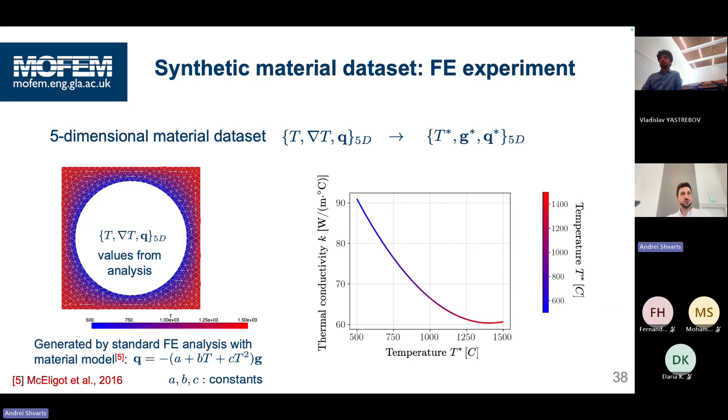If you do measurements, if the material is isotropic - no, so if it's homogeneous but anisotropic, there shouldn't be a problem. The problem starts when it is non-homogeneous, when different parts of the material behave differently, then you don't know which dataset to use. That's the problem. I'd say this is the only limitation of the data-driven method, that you need to map a dataset for a portion of material which is homogeneous. So anisotropy is not the problem - we didn't assume isotropy here. It's the homogeneity which is difficult, inhomogeneity which is difficult, if that makes sense.

I see what you mean, it's a very good question. You're saying it's like the Gibbs effect, when you try to approximate a delta function, or even just a jump, with many harmonics. No, this doesn't happen - this is a slightly different story here. Maybe you can think of special cases where higher orders would lead to oscillations. This happens sometimes, but not in elliptic problems.

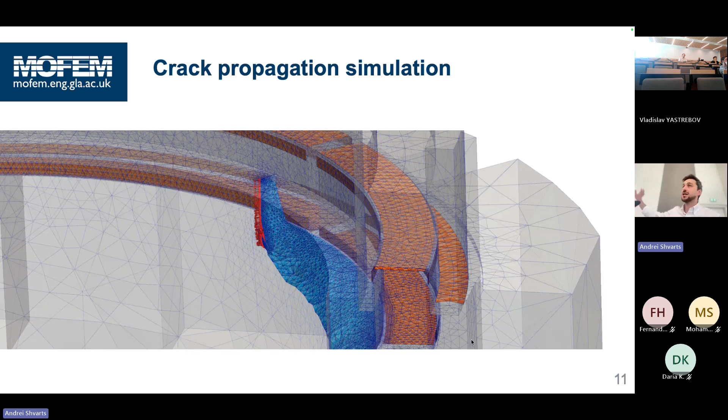But at least for parabolic and elliptic problems I've worked on, adding those higher orders just gives a more accurate representation. With the crack example I showed before, in that animation, we did adaptive p-refinement, with several layers of elements around the crack with high orders - everywhere second order, then a layer around the crack with third order, then another layer closer to the crack with fourth order. This only improved stresses around the crack tip, but actually it wasn't improving them enough. When we wanted to replicate analytical solutions for a cracked specimen starting at the notch, we had to use quarter point elements. With our adaptivity, when you move the nodes closer to the singularity, we can reproduce analytical approximations. But for many engineering problems, you don't need that.

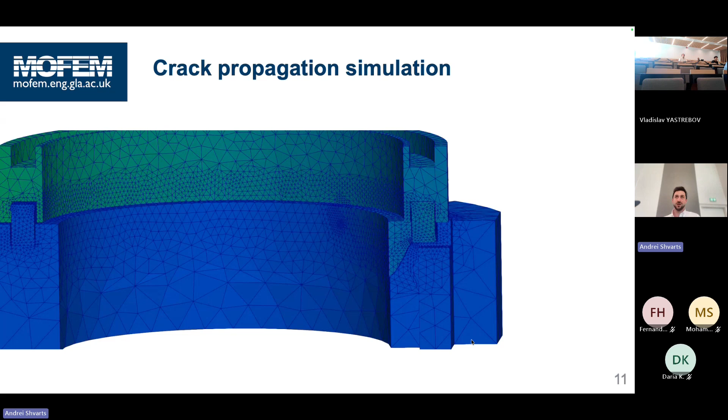I think you can find problems where adding high orders could lead to instabilities. Probably in some cases of hyperbolic problems that could actually be difficult, so then you just limit yourself to lower orders. But there are lots of problems where you strongly benefit from this, and crack problems are not where you get these issues—unless you start looking into acoustics around the crack, then maybe you'd have something more difficult.

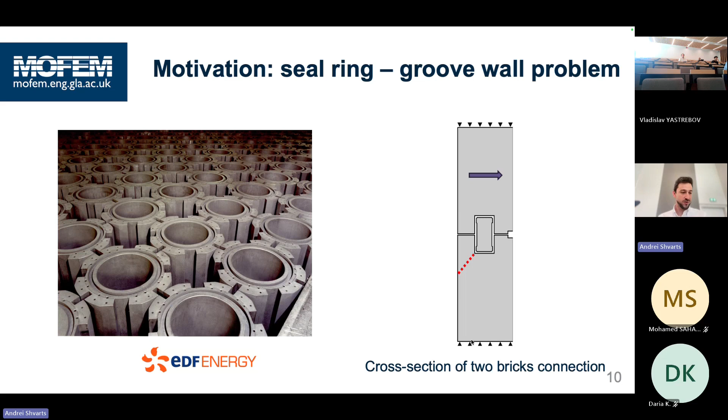The elephant in the room is that you have more degrees of freedom to deal with. But this different structure of the matrix helps you deal with them much quicker. Like the example I showed with contact at the end, where we solved this huge problem with 5 million degrees of freedom in 1 minute for one load step—that was with a second order of approximation of contact on top of the mesh, and first order for Lagrange multipliers. Of course we have more degrees of freedom because of that, but you can solve it more efficiently.

If you don't employ advanced solvers like algebraic multigrid, the curse of dimensionality coupled with this larger number of degrees of freedom will make things more difficult. But when you combine those two things together, it works. In general, p-adaptivity is more efficient than h-adaptivity—you converge faster if you increase the approximation order than when you refine the mesh. But it doesn't help you at the singularities. You need h-adaptivity at the corners where you have singularities, and p-adaptivity where your function is more regular, where you can benefit from the approximation.

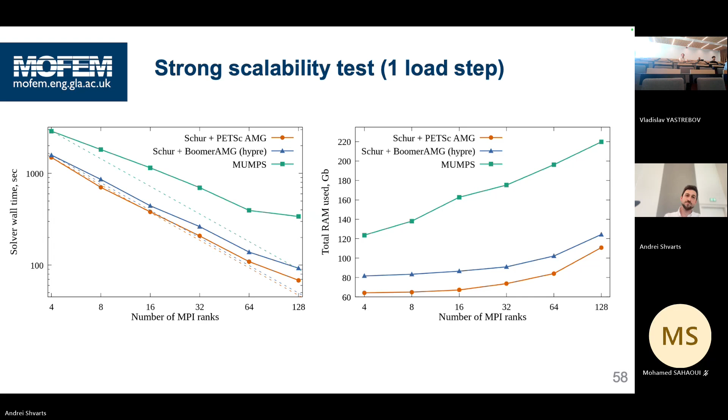It does require some thinking ahead. Let me try to open the slide where I'm talking about the libraries we're using. Right, so we are using tools from Sigma. It's a lab in Argonne, I think, one of the national labs in the US—not Chicago, if I'm not mistaken.

They have a library called MOAB, which is called Mesh-Oriented Database, and they have very efficient handling of mesh manipulations and access to different geometric entities. For an element, you can quickly get its adjacent edges, adjacent vertices, find bridges to other elements, and do this in parallel—asking for adjacencies from another processor and so forth. We have very quick access to this, and it's integrated into the MoFEM database, so we map degrees of freedom onto those entities.

Once we do that, it becomes pretty straightforward to implement higher order shape functions based on the degrees of freedom which live on the edge itself. The idea of these hierarchical shape functions is that the value of the degree of freedom does not have the physical meaning of the field value at the center. If you go for standard shape functions, the degree of freedom of N1 is the value of the field at node 1. For hierarchical functions, it is not—it's like an additional correction, similar to adding additional harmonics to a Fourier representation.

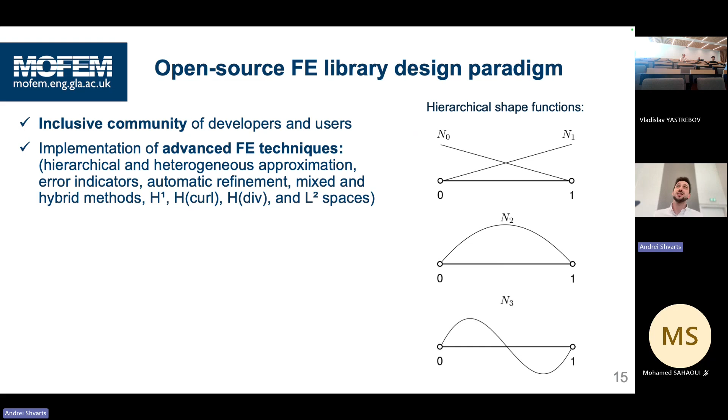As well as hierarchical functions on tetra, hex, and other elements. Those papers I mentioned from Ainsworth are mostly on tetrahedrons and triangles. Demkowicz's paper covers everything—triangles, quads, tetrahedrons, hexes, pyramids, wedges, everything, element by component, right?

When you assign volumetric tensorial Lagrange multipliers, every side has its own degree of freedom and its own volumetric representation of this.

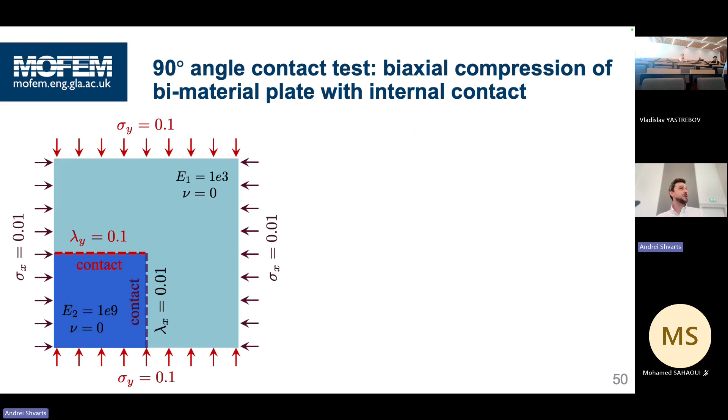It's not a different representation, it's the same field. We approximate the field in those shaded pink elements, and then you can approximate it with the degrees of freedom coming from this edge, and also from the degrees of freedom coming from this edge. So when you evaluate the Gauss points in these elements, we do this integration by parts and turn boundary integrals into volume integrals. If you have contact both over here and over here, evaluation of this field lambda at those Gauss points in this element would come from those two degrees of freedom.

It's a field. So this lambda, if I construct it on the whole mesh, it will have degrees of freedom on all of these edges, and if I go for higher orders, it's also going to be on the faces. The degrees of freedom start to appear on the faces as well, but we don't care about this for this example—first order approximation is enough, so it's only on the edges. With our code, since it's mesh oriented, I can choose which mesh entities will have degrees of freedom. So I do approximate this field lambda in the domain, but I choose it to be approximated only using degrees of freedom on the boundary edges, because that's enough to construct a sufficient approximation of the contact traction.

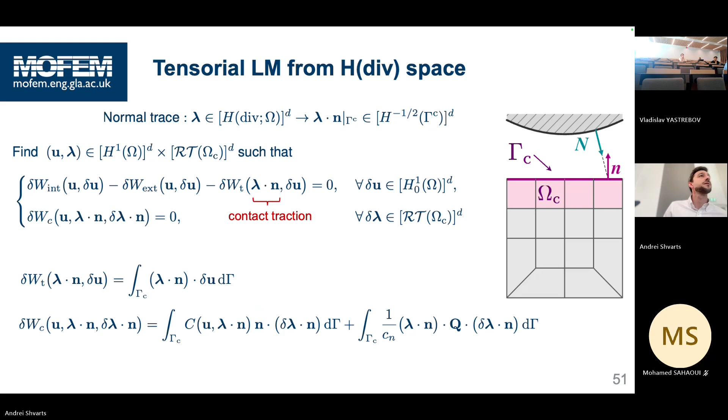Only one which has non-zero normal traction for that boundary, for edges, and then when you go for higher orders, that's more amount.

There are lots of works combining this methodology with other methods, clustering and inferring from the data set and accelerating the search. But I think in general, this data-driven method—it's hard to answer exactly because it depends on the problem. Maybe there are problems where this wouldn't be the best choice, like geotechnics problems, where you don't have much data—you can only drill in one particular place and get information from there, and that may not be enough to know. But I think this method shines best on problems when you have a lot of data, like thermal camera images or digital image correlation images, where you have whole fields of data and get a lot of points.

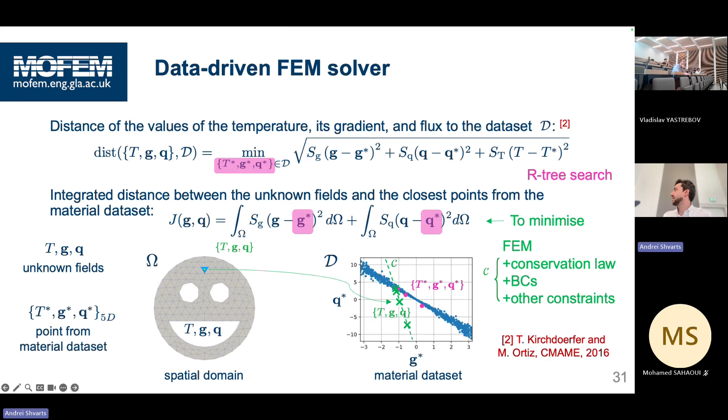I can't give you an exact metric of what is enough. Obviously, if you have one data point, you're not going to get much. You need enough data points which span all the possible values you want to have. But even with some of the examples I was showing, you can easily get into a state where you start to get values completely outside of the data set, so you need to add more data. That's why we were bothering ourselves with this same question—we wanted a methodology that would give a metric of how bad we are. But I think this is problem specific and data set specific, and that's what you have to deal with.

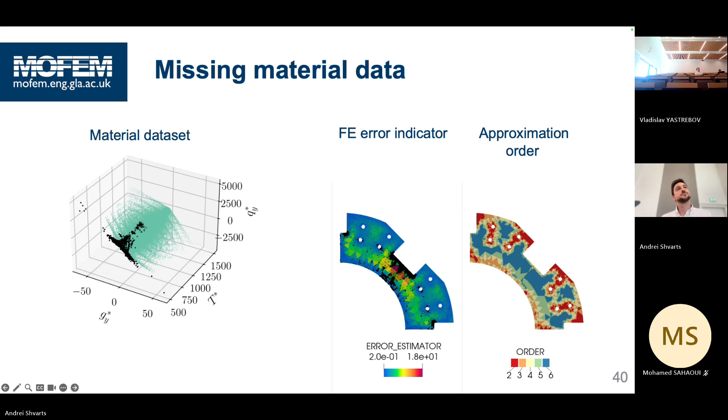I think we are done. Thank you very much, Andrei. Thank you.